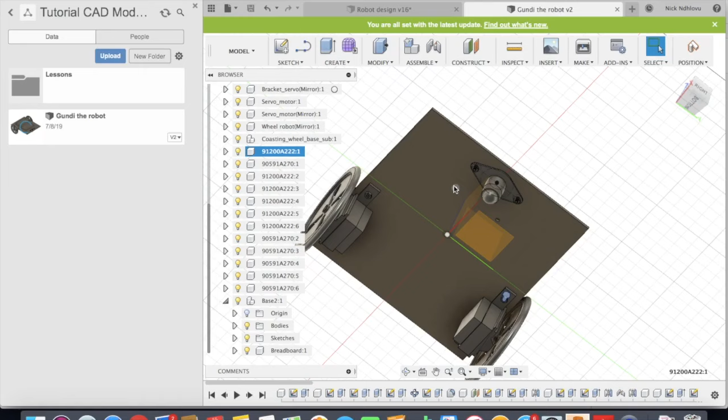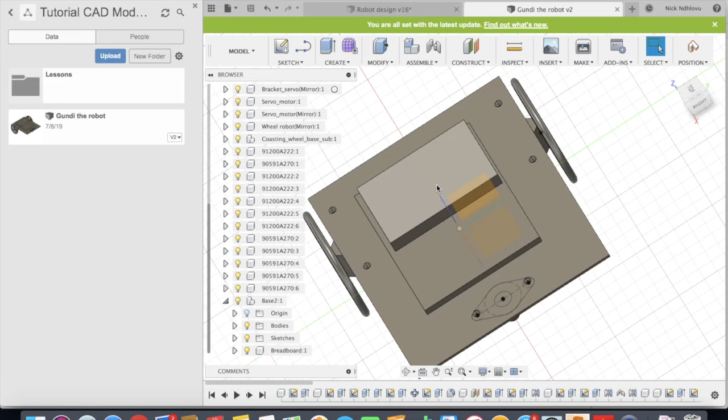In the previous lesson, we learned how to install standard parts such as screws and nuts from inside Fusion 360 from the McMaster catalog. So now in this lesson, we're gonna look at how we can import parts from outside of Fusion 360.

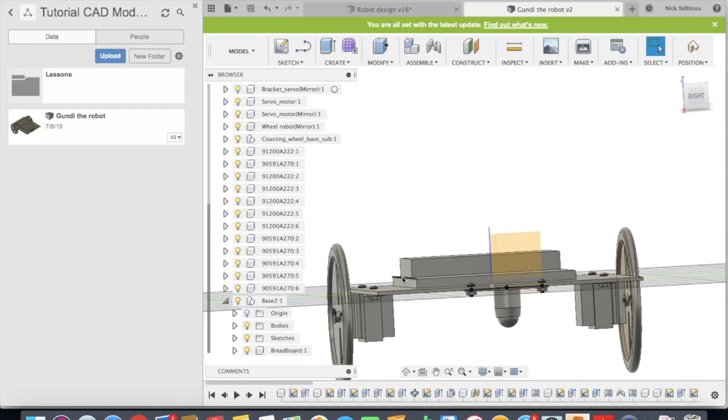For example, parts downloaded on the internet that you want to add here. The first thing I want to say is that I've added all the screws and nuts, and made all the joints here. So your model might not look exactly the same as mine, but like I've shown you in the previous lesson, I just repeatedly added the screws and nuts in all the other places.

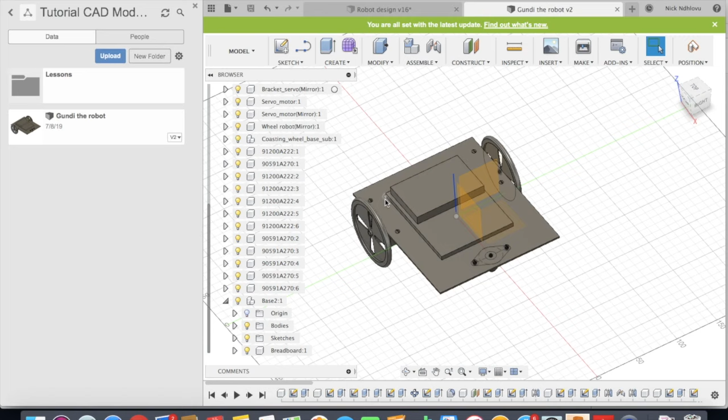The other thing I did, which I did not record, is creating this base and this breadboard. This is just a representation of our breadboard, and this represents the base which you saw in the first video of how the robot looks. The robot has a base in which the breadboard sits, and the Arduino board sits somewhere here.

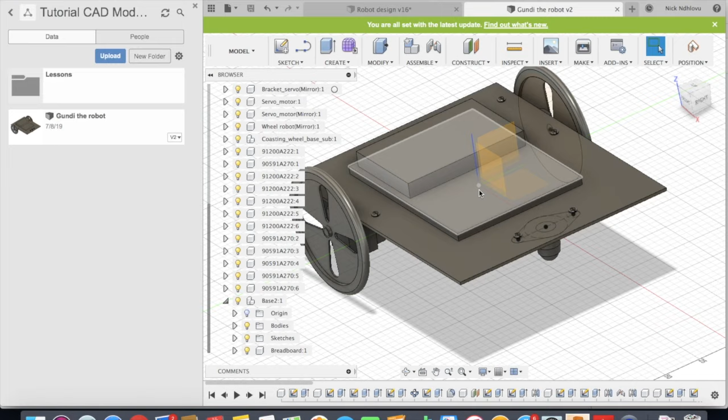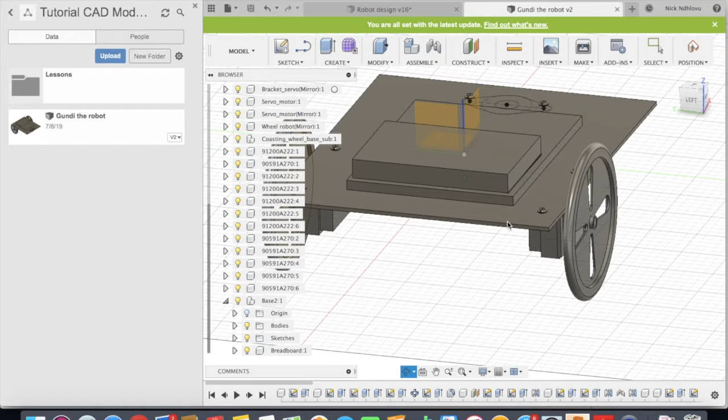I'm not gonna go into detail and model the breadboard. If you're watching this course, you should have the drawings of this part, so it should be easy to replicate. If you're still not sure how to model this, I suggest you go back to lesson 1 and 2 and you'll see how we can model something like this. So this is just a box, literally just an extrude.

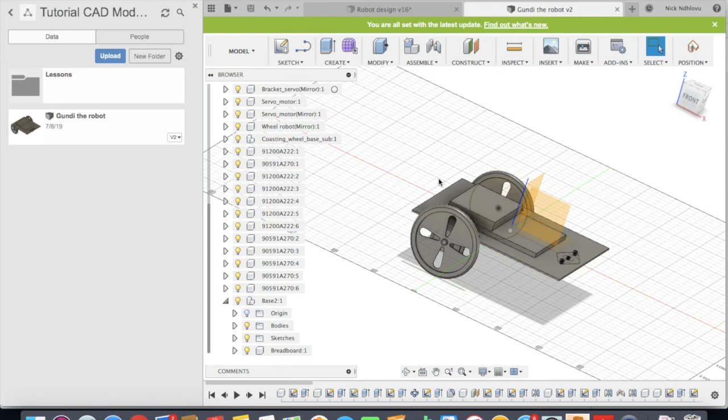So I've created these two extra parts, I just wanted to save time with that. Let's go ahead with this lesson. We want to import parts from outside of Fusion 360, so let's go on the internet and look for parts.

My favorite place to look for parts is a website called GrabCAD. What I like about it is that it has the largest collection of CAD models, from everything, from people designing cars, trucks, and it's all for free. You have all these models available, and you can go by category and check components.

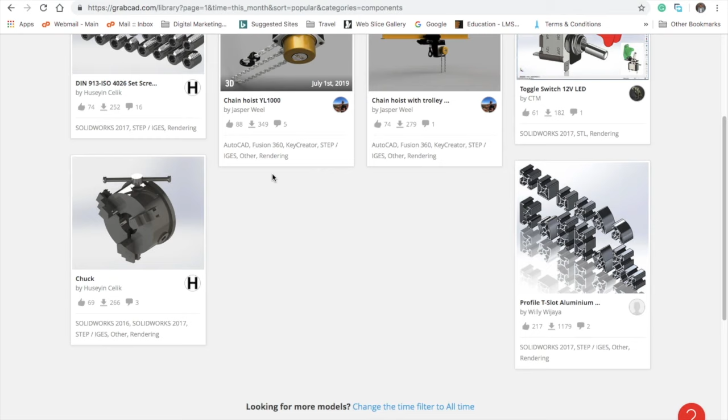And you can view the CAD models of these files. The first thing we want to do is register, first of all. I've already registered, it's for free. So just register for a free account at GrabCAD and you'll be able to download all these files.

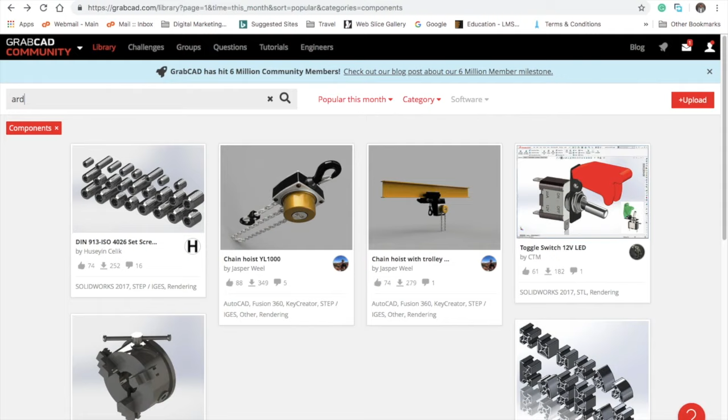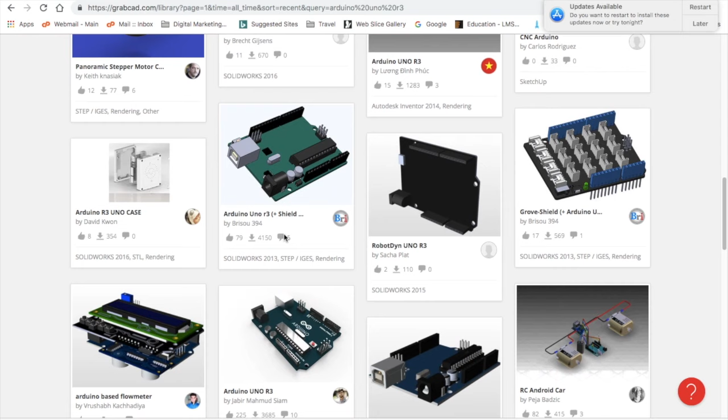So the first thing that we want is an Arduino board. Once again, remember you need to have an account before you can download the models. It's all free, and you can see there's quite a lot of models of an Arduino board. Some of them are more in detail, some are not.

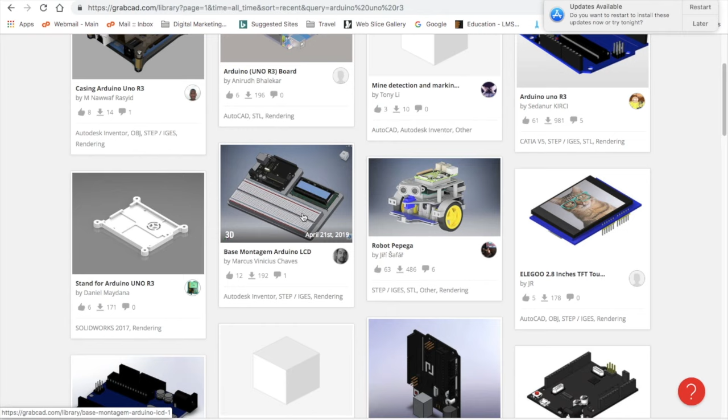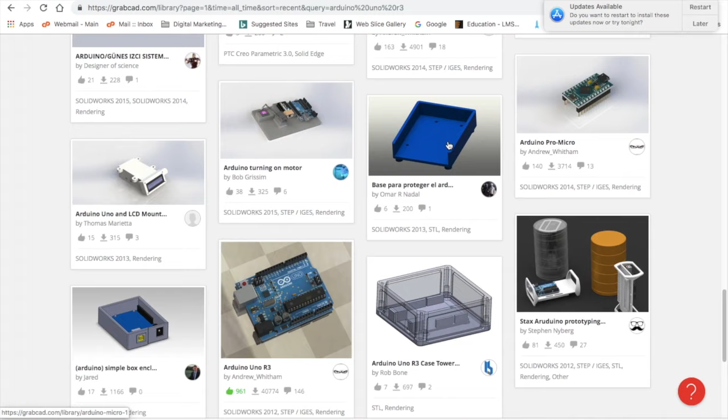For example, here they have the breadboard, and they also have an Arduino. Here they have another robot. So there's a different types of standard components that you can download straight out of GrabCAD. The one that we're interested in is this one, it looks more detailed, so let's check this one out.

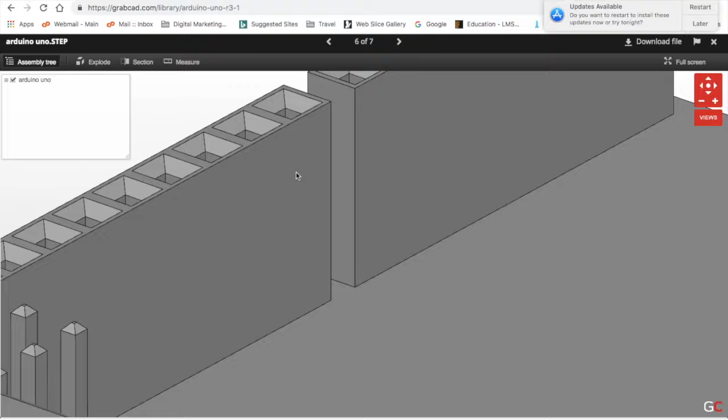And you can clearly see there's some images and some renderings. We can open it, GrabCAD has its own 3D viewer. And then in here we can obviously rotate it around, spin it around, check out the features. That's the nice feature about GrabCAD.

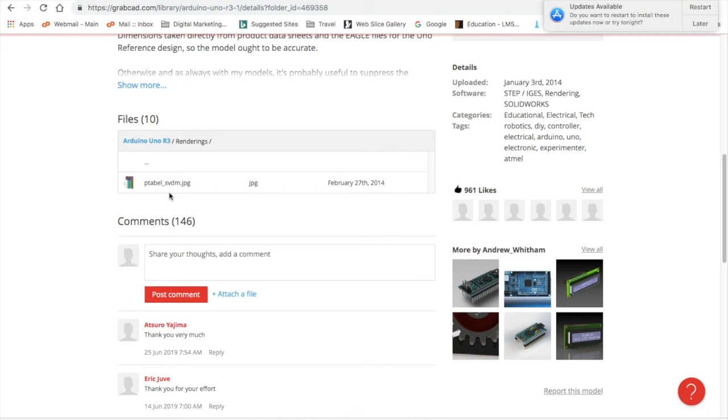If you're interested and you'd like to download the file, you can just come here and click download, or alternatively, I like to come here. So here there's a folder, you can go through here. What's important to notice is that you'll see all these files have a different format.

So this one is a step file, this is the one we're interested in. I just think it's easy for Fusion 360 to work with step files because it'll always work. So we always want to try and download components in step file, it's sort of like the universal file format for CAD.

So let's go ahead and do that. You just scroll over here and click download. But I've already downloaded it before, so just gonna skip this part. Let's go back to Fusion 360.

So we're back here at our workspace. Now, in order for us to import this part, I also have to mention, before we can proceed, you can also download the ultrasonic sensor.

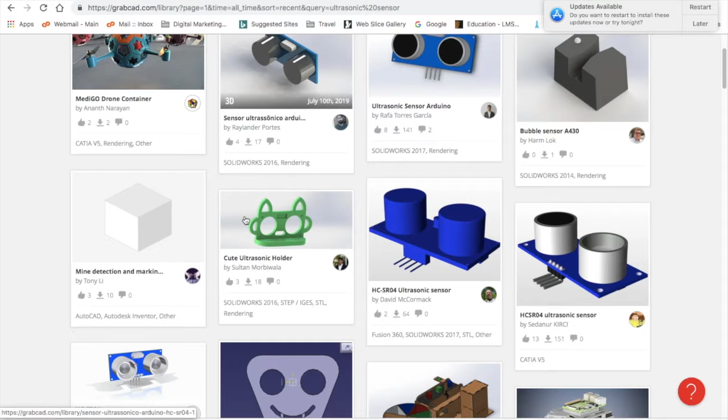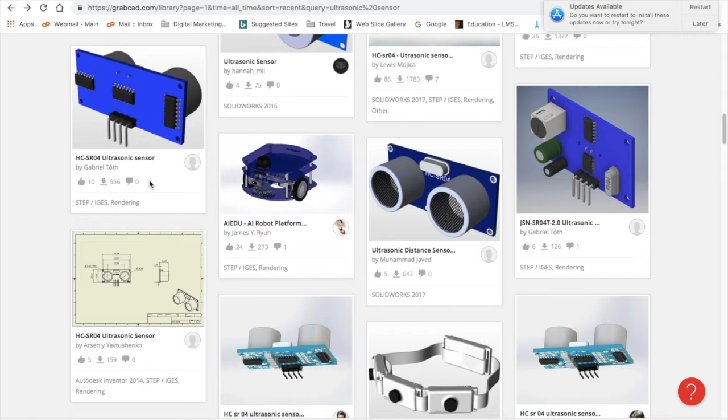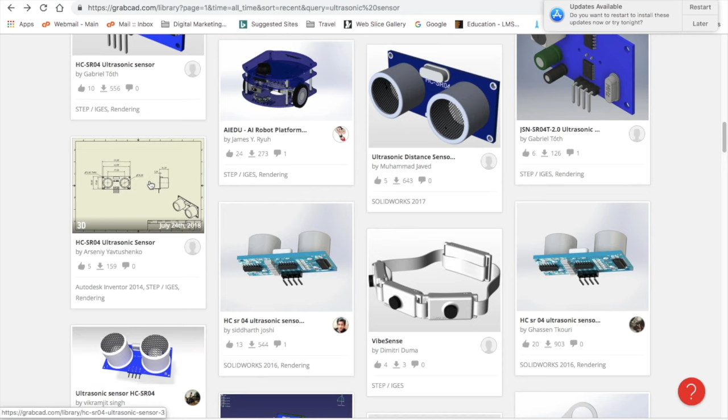You can download it in a similar fashion, just look at the one that you want. If you want the exact one that I have, just go back to the project files that I've uploaded and download the same one. I'll put up a link where you can download all the project files I used in this project. So if you want the exact replica model that I have, or you can download your own ultrasonic sensor.

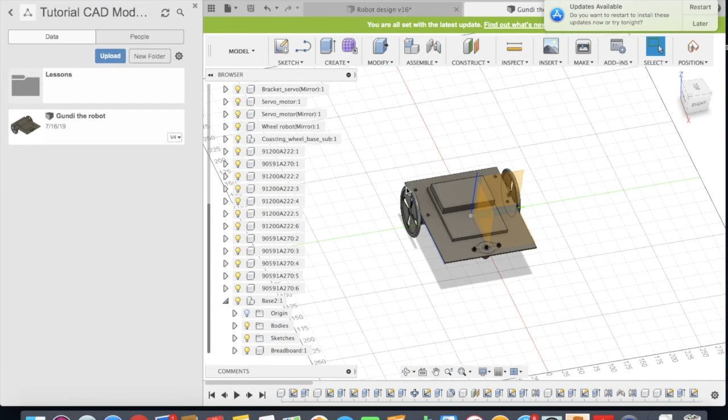Let's go back to Fusion. Okay, coming back to Fusion, now we want to import the part we've just downloaded from the internet. The way we do that, we scroll over to this side and we go to upload on the same folder that we've created. We click upload, and we can either drag and drop or go into our computer files to select the file we want to upload.

So I'm gonna go ahead and do that. And then here, to my folder, to my downloads folder, I'm gonna import this file. Click open, upload.

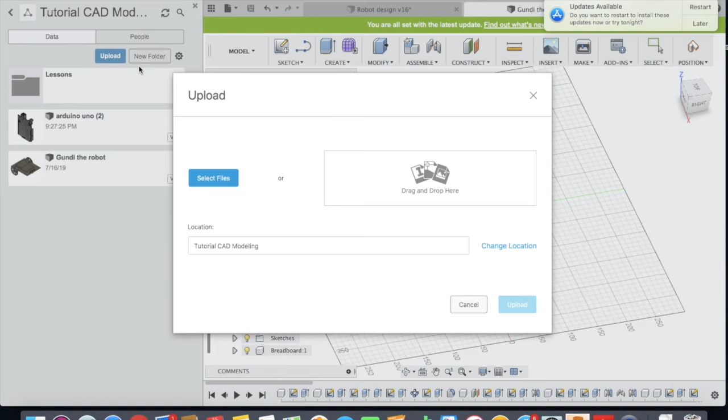All right, then the last thing I want to import is the ultrasonic sensor as well. So let me just do that, I just forgot to import it together with the other one. So I'm just gonna look for it.

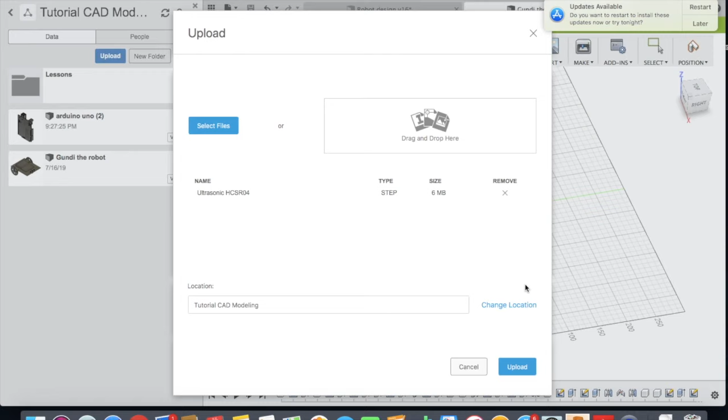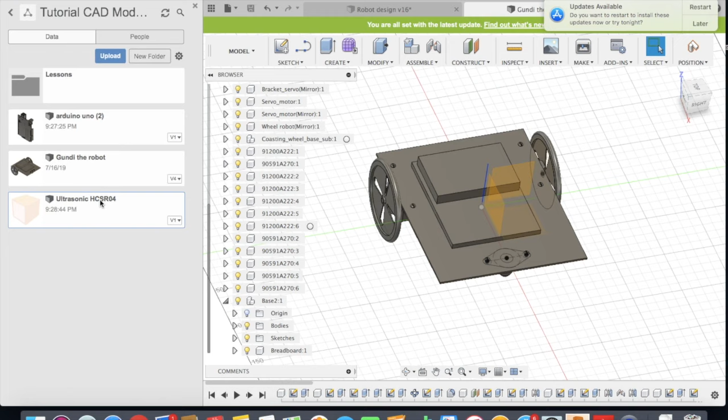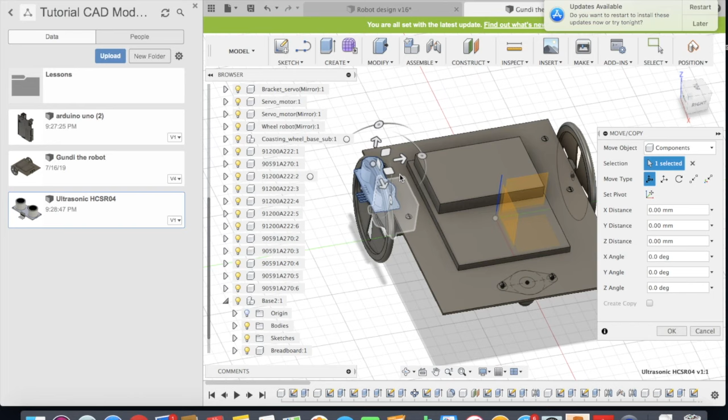So now what we need to do is try and import these parts and get them here into our model. The way we do that, we just come here, right click, insert into current design. And then once it's here, you can start moving it around, so like any other component.

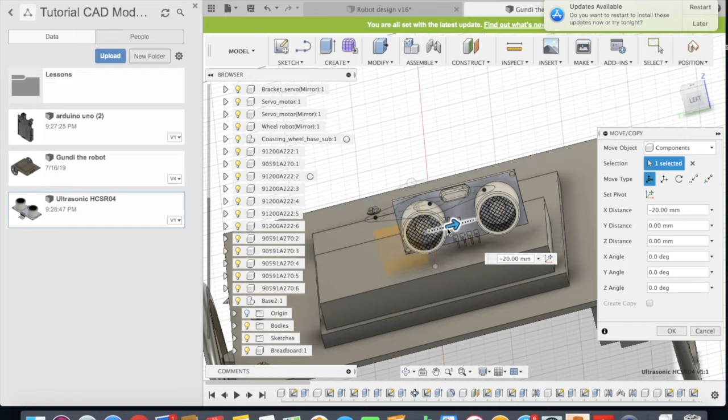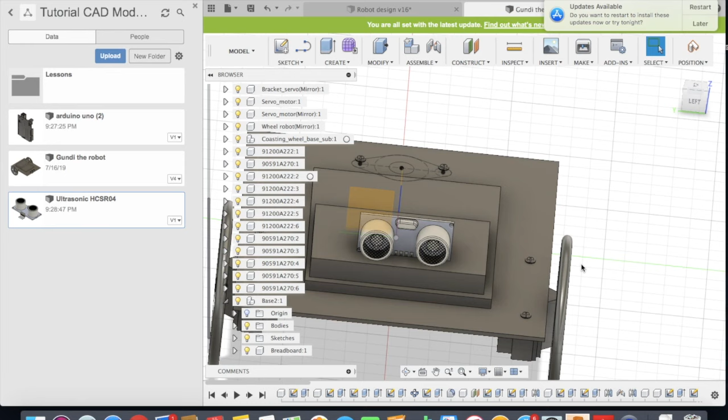So we would like to place this on the breadboard, so I'm gonna move this. Gonna do the same thing with this one.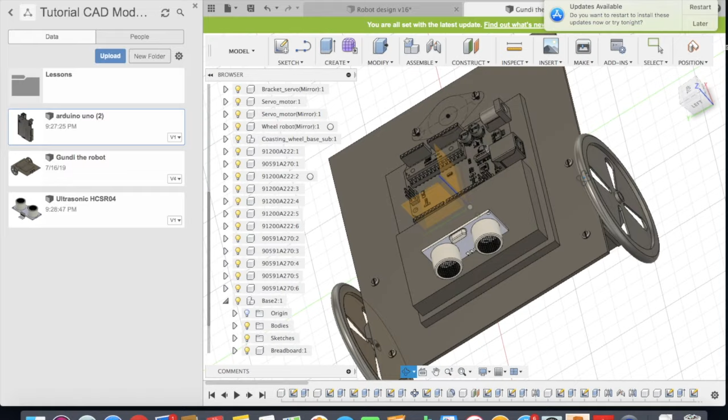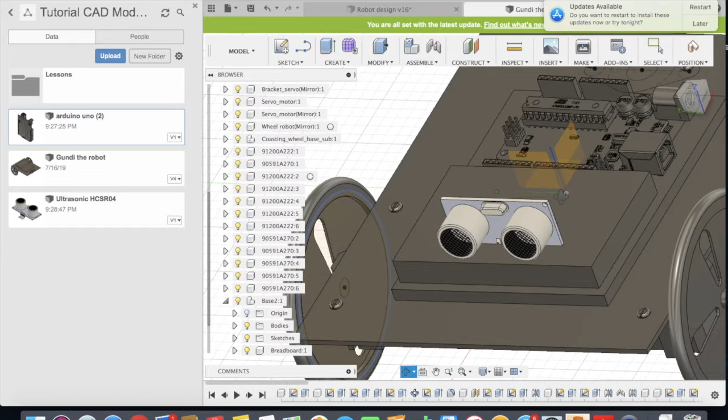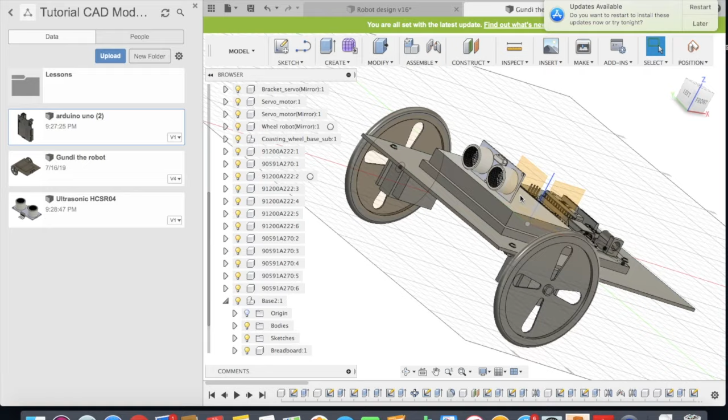Alright guys, so this is where we're gonna leave it on this lesson. I'm sure you've learned a lot now on how to get standard parts from the catalog and also from the internet. Don't worry too much about the placement of these parts, when you use the project files I'm gonna put everything according to dimensions. I'm just doing this to show you how to lay parts on your model. Then in the next lesson, I will show you how you can create a cover plate for this robot.